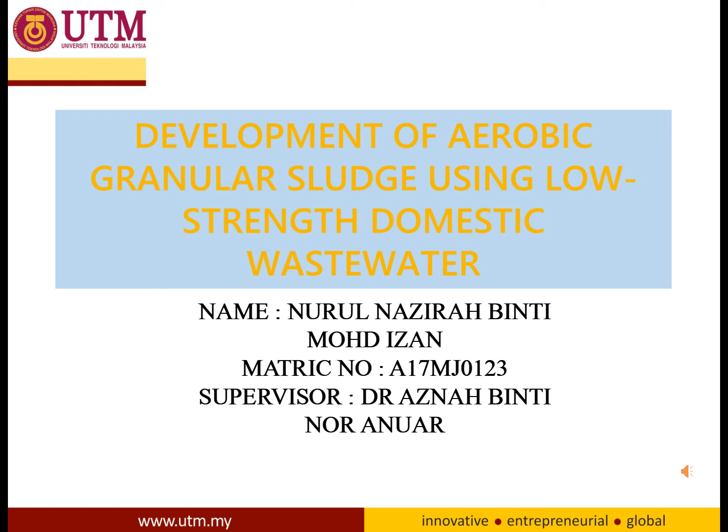Let's move to introduction. Growth rises in urbanization will inevitably require the development of new water resources, leading to an increase in the amount of wastewater which must be treated before it can be released into the natural ecosystem. Generally, wastewater treatment includes four basic components, which is physical, mechanical, biological, and chemical. Aerobic granular sludge is one of the wastewater treatment systems.

The conventional activated sludge process system is the standard technology for biological wastewater treatment. The AGS technology has been developed and is currently mainly used to treat urban wastewater with high concentrations of organic compounds, which is chemical oxygen demand, which mainly come from different sewage systems.

The activated sludge method is currently the most widely used biological method in domestic wastewater treatment plants because bacteria and other forms of microorganisms in the system need oxygen to survive, expand and multiply in order to absorb dissolved organic matter or contaminants in the wastewater. In this treatment method, the wastewater that contains dissolved organic matter in the aeration tank will be gassed.

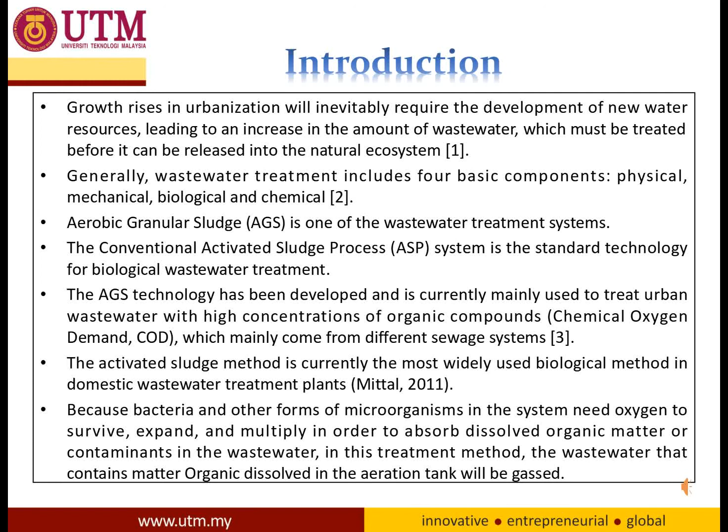So, for the problem statement, the aerobic granular sludge process is a new method for treating domestic and industrial wastewater. Self-immobilized bacterial cells form solid, compact, and well-settling aggregates in granular sludge, which can be thought of as a special case of biofilm. Because of the granules' properties, the process can accommodate high loading rates as well as radioactive substances in a small bioreactor, with rising pollutant loads and often limited capacity to expand existing treatment plants. As a result of urbanization, this effective low footprint process becomes an appealing alternative.

Despite numerous studies on the use of aerobic granulation technology in the treatment of domestic wastewater, research on low-medium strength wastewater appears to be lacking due to low and complex substrate availability, which does not favor aerobic granule development. The aim of this analysis is to see how aerobic granular sludge develops in low-strength wastewater. At the Indah Water Research Centre in Kuala Lumpur, a sample of domestic wastewater is taken and the experiment is carried out.

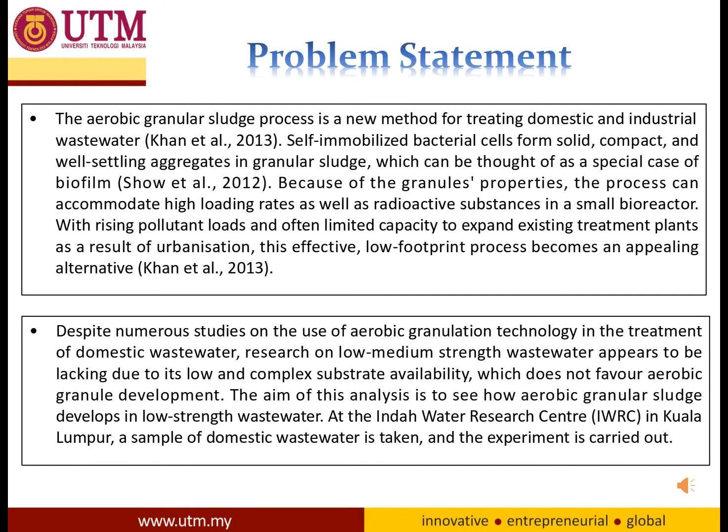The purpose of this proposed research is to study the formation of aerobic granular sludge in low-strength domestic wastewater. Therefore, the specific research objectives will be as follows: to prepare and determine the characteristics of raw wastewater sample from extended aeration plant located at Bunus Indah Water. The second is to characterize the conventional sludge that has been used as a seeding to start up the AGS bioreactor. And the third is to monitor the formation of aerobic granular sludge in the AGS bioreactor.

For the scope objectives, the aim of this research is to see whether AGS can be grown in a pilot-scale bioreactor using low-strength domestic wastewater. The following scope must be accomplished in order to meet the study's goal and objectives: the characterization of domestic wastewater and seeding sludge, as well as the growth of AGS, are the two main components of this research. Indah Water Research Centre supplies the wastewater and seeding sludge. The bioreactor is housed at Indah Water Research Centre and the experiment is also held there.

Sequencing batch reactor was used to build and run the bioreactor. The bioreactor was designed to run continuously for 24 hours, with each batch completing a 3-hour cycle. The wastewater sample was taken and the return sludge would be used to make new activated sludge. The inoculum from the freshly returned sludge will then be used to start the granulation process in the bioreactor.

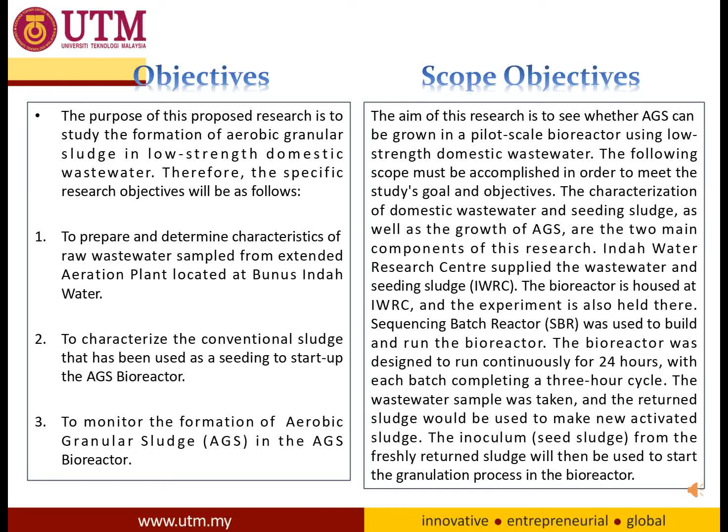Next, for the methodology for the study, the experimental work for this study focused on the development of AGS by using low-strength domestic wastewater in pilot-scale bioreactor for treating domestic wastewater. This chapter describes the pilot-scale experimental setup and analytical procedure in order to determine the formation of aerobic granular sludge using low-strength domestic wastewater. The parameters involve the concentration of chemical oxygen demand, total inorganic nitrogen, ammoniacal nitrogen, nitrate nitrogen, phosphate, biological oxygen demand, and total suspended solid.

A pilot-scale sequencing batch reactor was set up for AGS studies at Bunus STP, which was operated at ambient temperature of about 27 to 30 degrees. The development of AGS in the pilot-scale sequencing batch reactor was monitored from time to time.

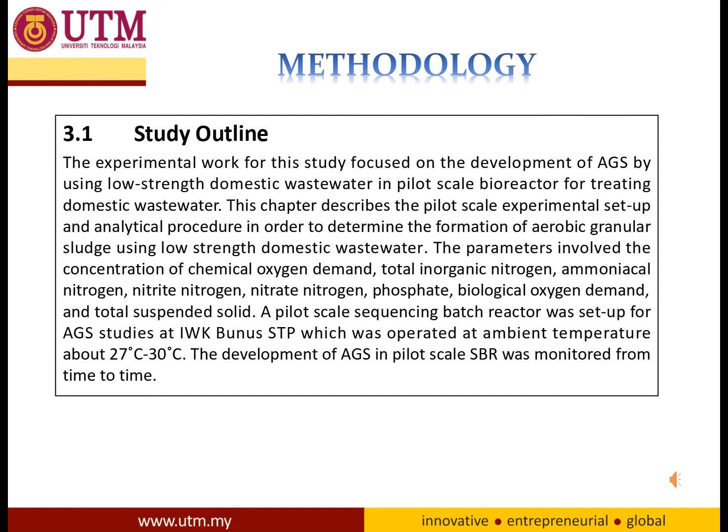Material preparation for domestic wastewater. In the Water Research Centre, a local municipal wastewater treatment facility provides a sample of real domestic wastewater before any form of treatment, with a mesh of 1 mm to remove large debris and solid materials that can clog bioreactor influent tubes. 3 times a week, the sample was collected and fed into a bioreactor device. The wastewater characteristic analysis was also performed on the same wastewater.

Next, for the seeding sludge, seed sludge samples from the IWRC aeration tank were used to make the perfect seeding sludge. 1.125 liter of activated sludge samples were planted in the bioreactor at the startup stage. The seed sludge was sieved with a mesh of 1.0 mm to remove large debris and inert impurities. It was aerated for 24 hours before being continuously fed synthetic wastewater.

The biomass increased after a period of decay, indicating the microorganisms had adapted to the new feed and were ready to move on to the next stage of the experiment. The seed sludge had a loose, fluffy structure and was brown in color.

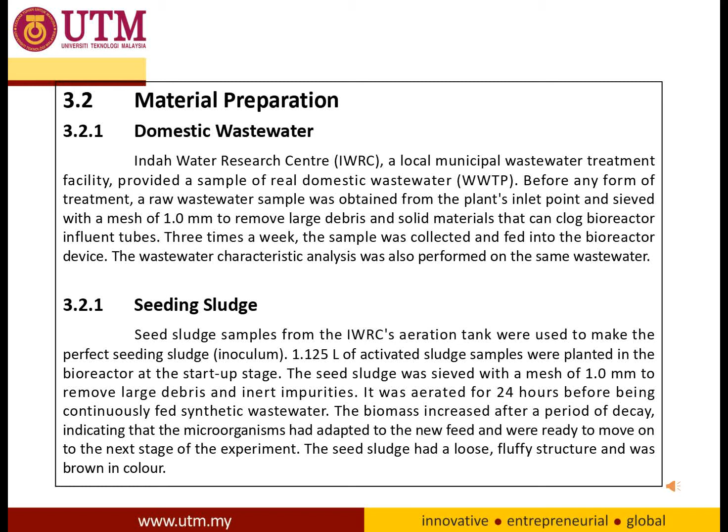Next, for the bioreactor setup, the experiment was performed at the Indah Water Research Centre in Titiwangsa, Kuala Lumpur. The working volume of the CAgSBio, which is cyclic aerobic granular sludge bioreactor, was 2.5 liter. The bioreactor was of the column type with a tall and slender form. Figure 3.1 shows a 2.5 liter cyclic aerobic granular sludge bioreactor in the laboratory environment.

During the startup time, 45% of total volume of the bioreactor was filled with return sludge from IWRC as inoculums. Digital timers configured according to the required duration operate the feeding pump, discharge pump, and aeration pump for each step in the bioreactor.

Then the bioreactor was designed to run continuously for 24 hours with a total cycle time of 3 hours. The process begins with 60 minutes of anaerobic feeding from the bioreactor's bottom without stirring, followed by 84 minutes of aeration, 30 minutes of settling, and 6 minutes of effluent withdrawal in one period.

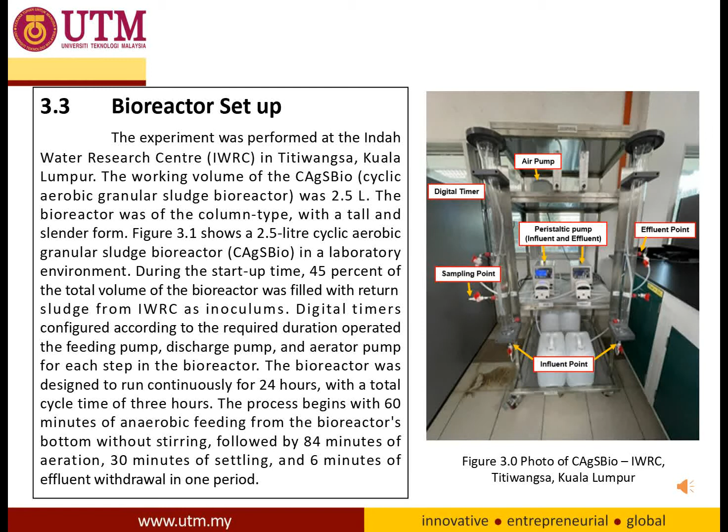Next, for the wastewater characteristic analysis, organic nutrients, inorganic compounds, and toxins can all be found in domestic wastewater. pH, chemical oxygen demand, biological oxygen demand, phosphate, ammoniacal nitrogen, nitrite, nitrate, total nitrogen, total suspended solids, volatile suspended solids, and total dissolved solids were all used to characterize the wastewater.

The parameters involved in the wastewater characteristics will all be tested. Stated is the procedure of pH, COD analysis, and total phosphate analysis.

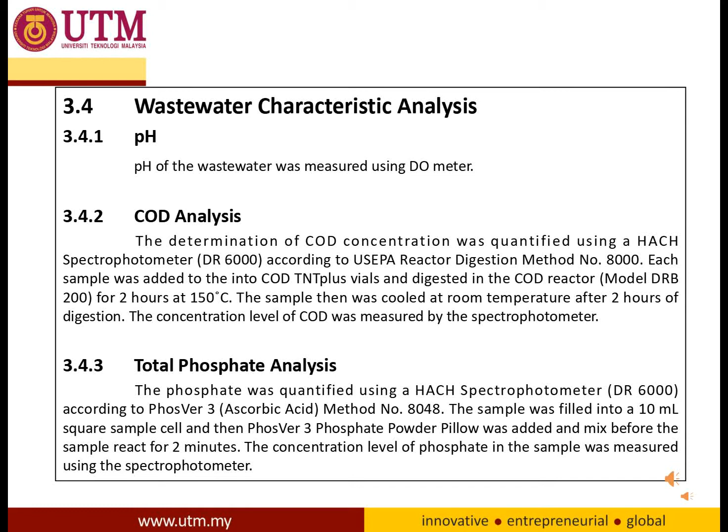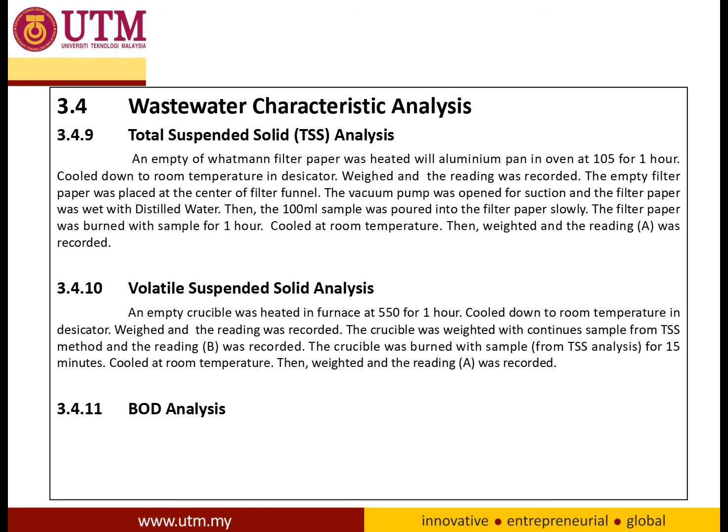For the seed sludge characteristic analysis, using seeding sludge from the activated sludge, an aerobic granular sludge was developed. In an effort to provide an optimal seeding sludge, sewage activated sludge was used. It was also used to develop aerobic granular sludge as a source of microorganisms. The properties of fresh activated sludge were investigated in this analysis.

MLSS, which is mixed liquor suspended solids, mixed liquor volatile suspended solids, sludge volume index, size, and settling velocity were all used to determine the physical characteristics.

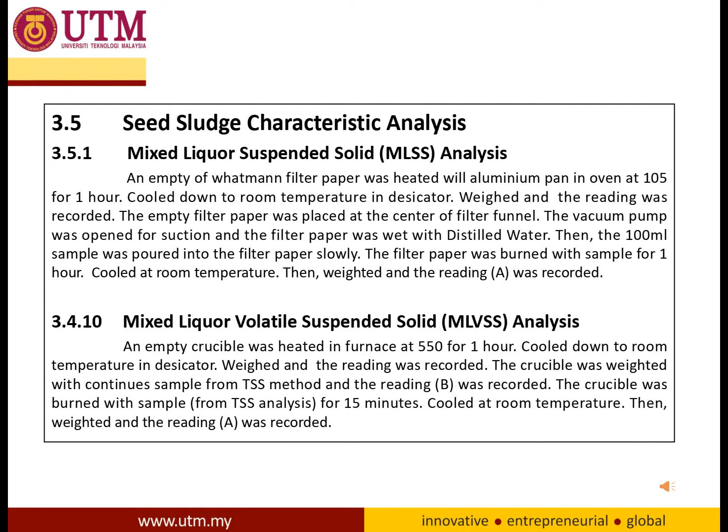As shown in the table, this is the result for the characteristics of domestic wastewater, which include all parameters: pH, alkalinity, COD, soluble COD, BOD, ammoniacal nitrogen, nitrite, nitrate, total nitrogen, phosphate, total phosphorus, total suspended solids, volatile suspended solids, and total dissolved solids.

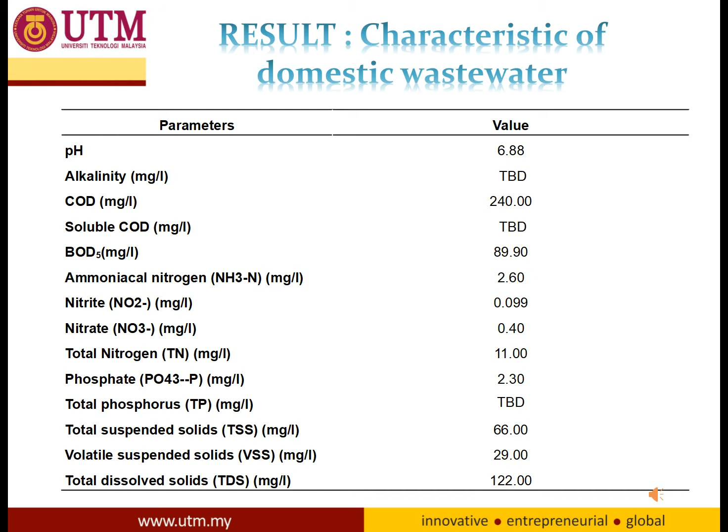Then also the results of physical characteristics of sludge, which include parameters of pH, MLSS, MLVSS, SVI, size, and settling velocity.

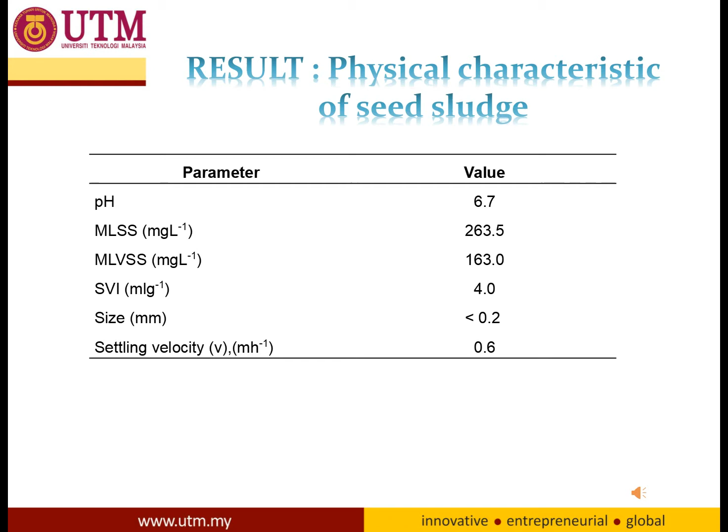Okay, next, figures 4.0 and 4.1 illustrate COD in influent and MLSS in the bioreactor. As can be seen in the figure, the influent COD concentration ranges from 260 mg per L to 316 mg per L. The performance of the SBR in COD removal is dependent on the availability of oxygen within the system. The higher COD indicates the higher amount of pollution in the water.

The range of MLSS in the bioreactor is from 5,465 mg per L to 3,880 mg per L.

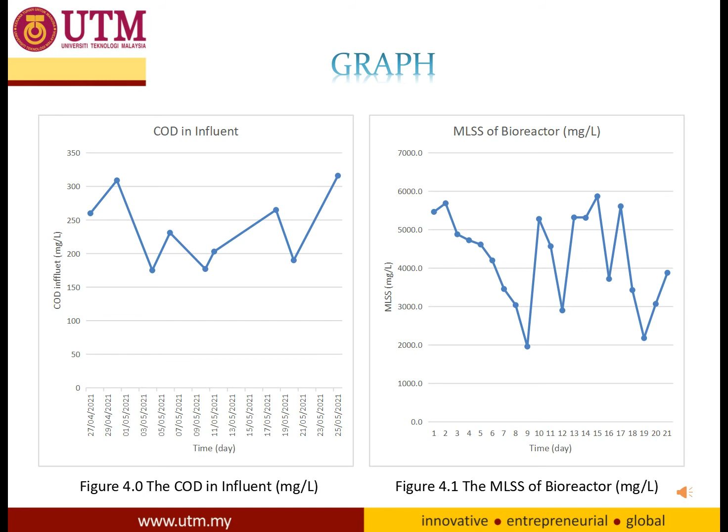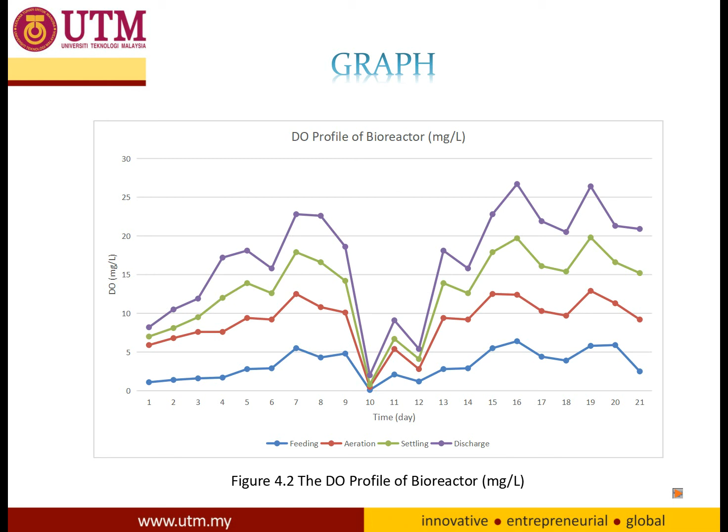Lastly, in conclusion, aerobic granulation has been demonstrated as a promising treatment alternative for actual low-strength domestic wastewater treatment based on studies carried out at lab, pilot, and full-scale levels. Aerobic granular sludge was successfully developed in a short time in a pilot-scale bioreactor with real domestic wastewater at ambient temperature of 27 degrees Celsius. The formation of aerobic granular sludge can be developed rapidly with low-strength domestic wastewater.